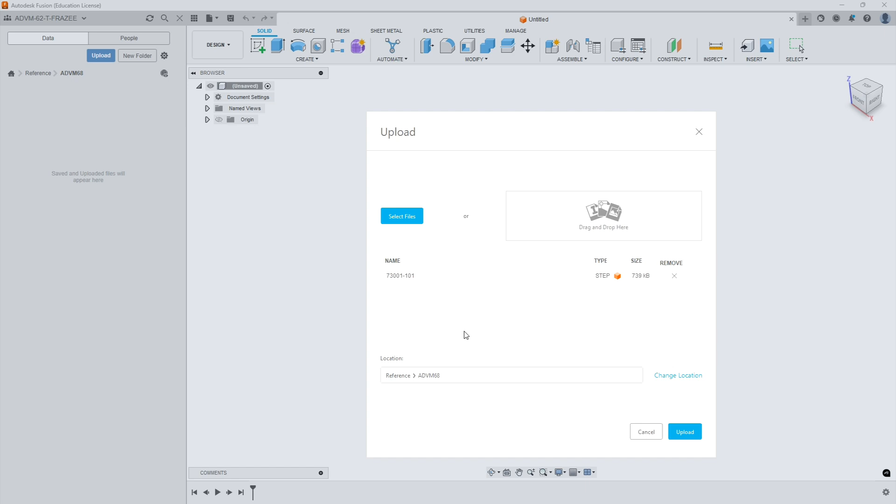Okay, and we're going to open that file. It's going to ask you where you want to put it. I'm going to put it in the location where I'm at. This takes a little bit of time to load, and you'll see it upload on the left. The icon should show up for the model. Depending on the system, this may take some time, so be patient. Then you can open the file.

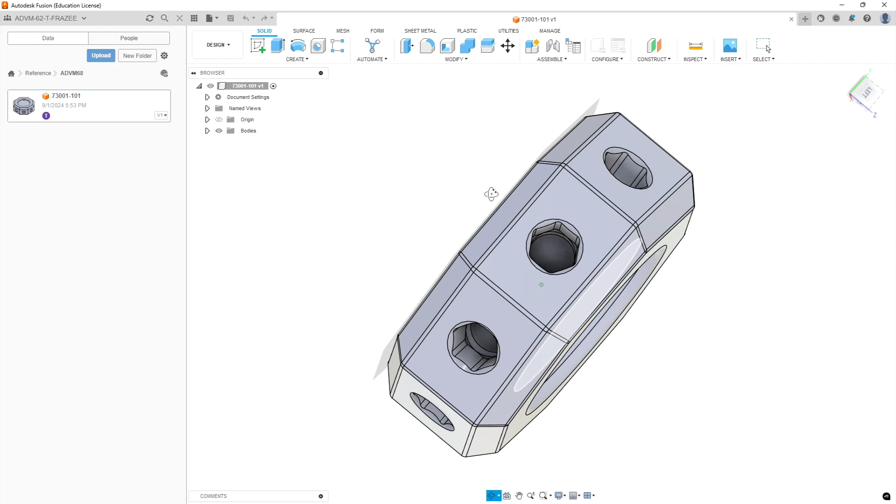Okay, so our file is this octagonal shape with a bunch of hex holes around the outside edge. We're going to use those to insert tool bits, like Allen size tool bits or screwdriver bits. This can be used to hold up to 8 different tools.

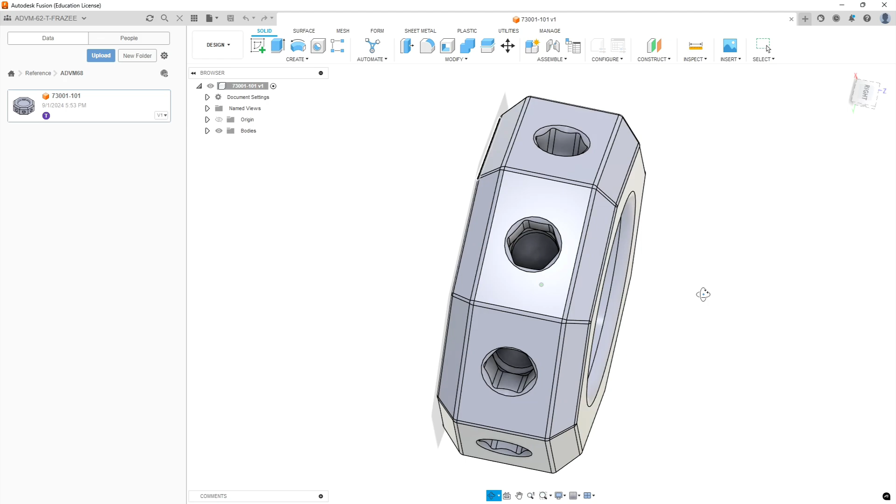Okay, so the first thing we're going to do is set this up as a 5-axis project. We've had the luxury of having blanks pre-made with the Raptor profile for the Raptor vise. The Raptor vise specifications are also in PDF format on Canvas, but if we take a look at the profile, this is a standard dovetail preparation for the vise holding system.

One downside of this system is that you have to have very tight tolerances on your prep, but it allows you to hold onto something with about 1/8 of an inch of thickness. So we're going to plan our stock around this dovetail and around a piece of material that's 1 inch thick from datum to its top. Our dovetail feature will be on the face of that.

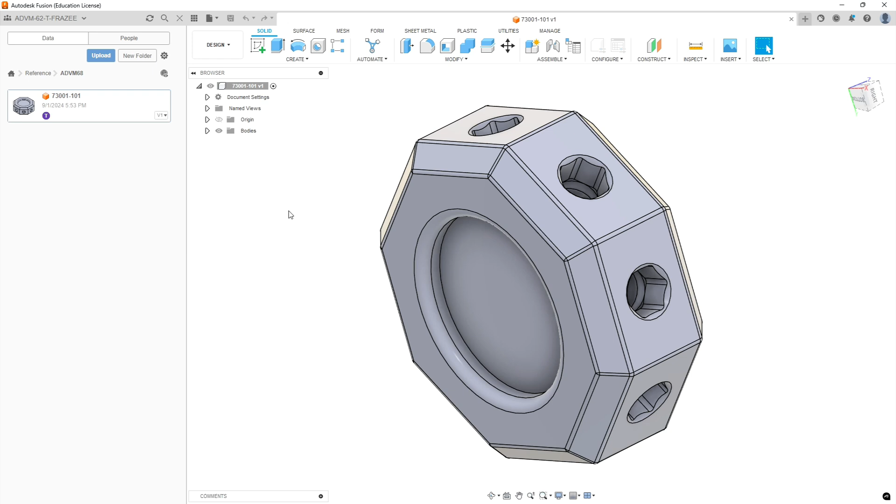Even though we've got pre-made blanks, we want to start off by modeling that blank, because in 5-axis it's going to help you with some visualization. So I'm going to flip back to Fusion here. What we have here is our piece, and if we were to inspect it, it's a 3/4 inch thick part.

Okay, so what we're going to do is create our volume, and it's a 2 inch by 2 inch by 1 inch volume that this part needs to fit into, plus stock to hold onto it with the Raptor profile. So let's start there.

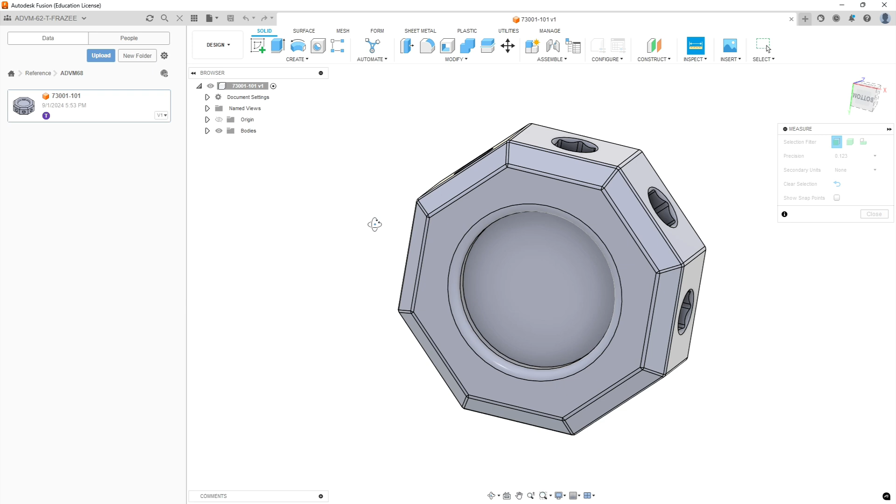We're going to go to Sketch, and we're going to sketch on the top plane. Okay, and we're going to draw our square. From our vendor, this is 2 inches. The top edge equal to the vertical edge, which gives us a 2 inch square.

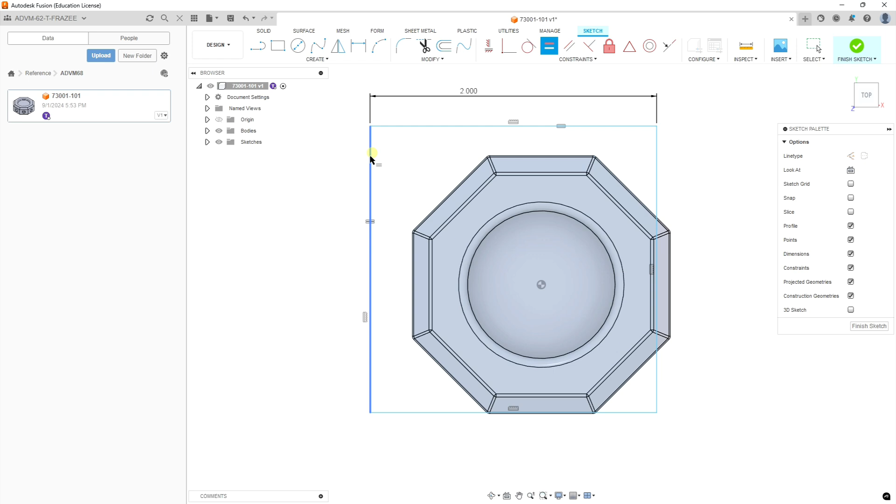Then if we take a line and go from corner to corner, we can convert that into a construction line by right-clicking on it. We derive this, and we should be able to get a midpoint relationship with the origin, which puts our volume centered on the face of this.

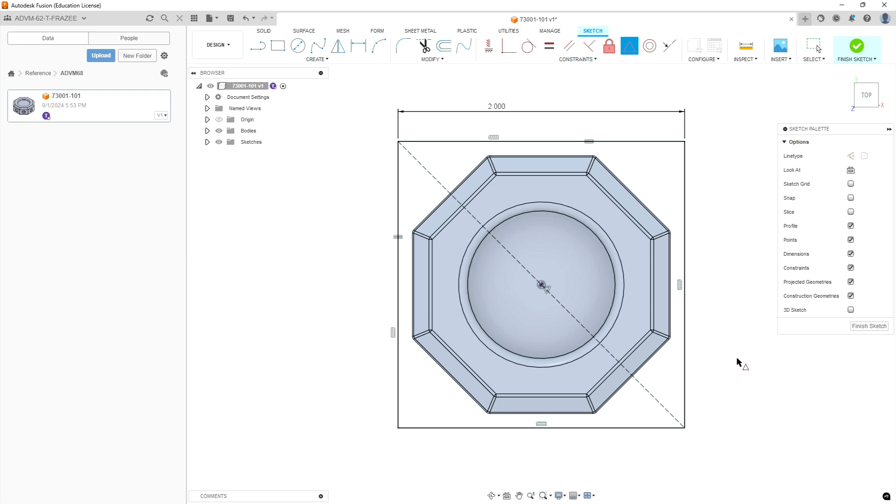Okay, so we're going to finish our sketch. The blanks we got are machined on the face, but we do want to cut a little bit off, that way we are sure that it's all true to our setup and our machine. So we're going to do an extrusion.

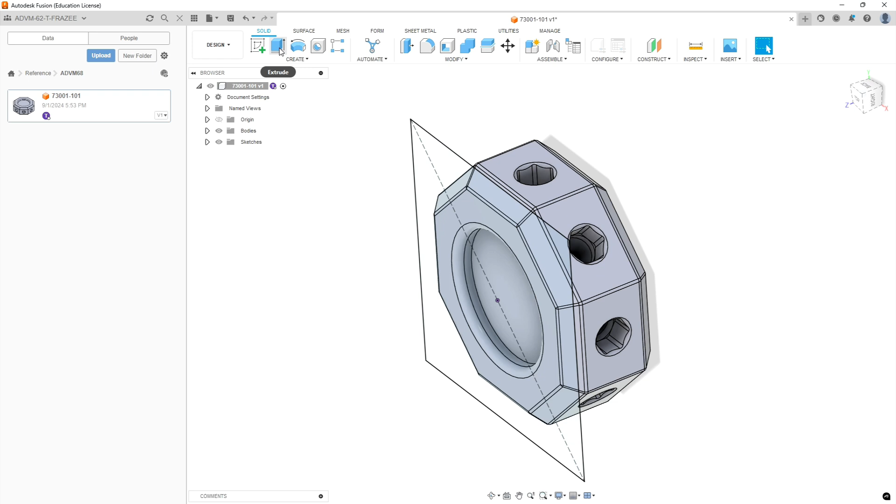We're going to hit all of these faces. We're going to create a new body. We don't want it to join, because this is going to be stock. And we're going to go ahead and go in two directions.

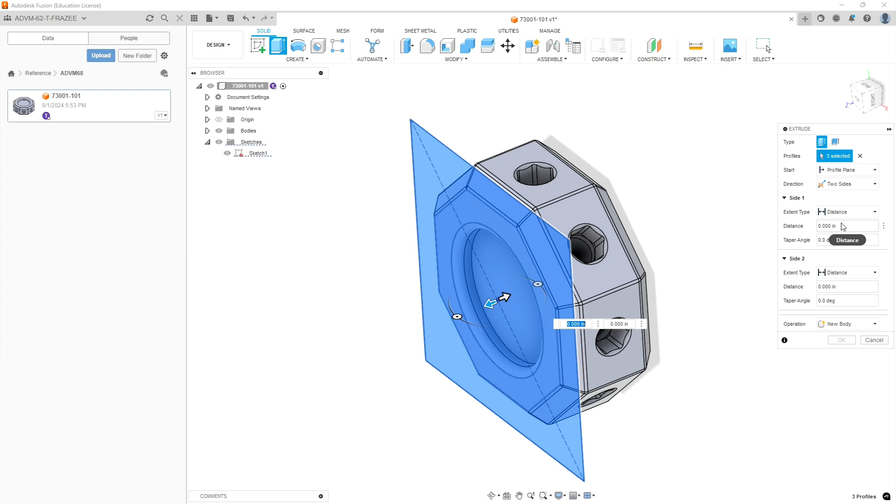In the first direction, let's go 30 thousandths. We just want a little bit of material. In our opposite direction, we're going to go 1 inch minus our 30 thousandths, so our total stock volume is 1 inch.

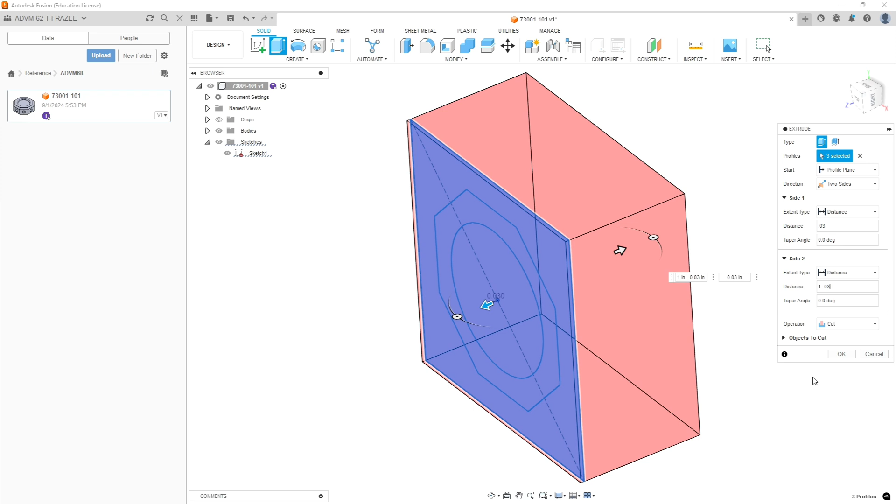Make sure that your setting is on new body, and hit OK. Now if we go to our bodies, we have part 1, which is the part we imported, and body 2, which is the stock. I'm going to change this to the name of the second body, to stock.

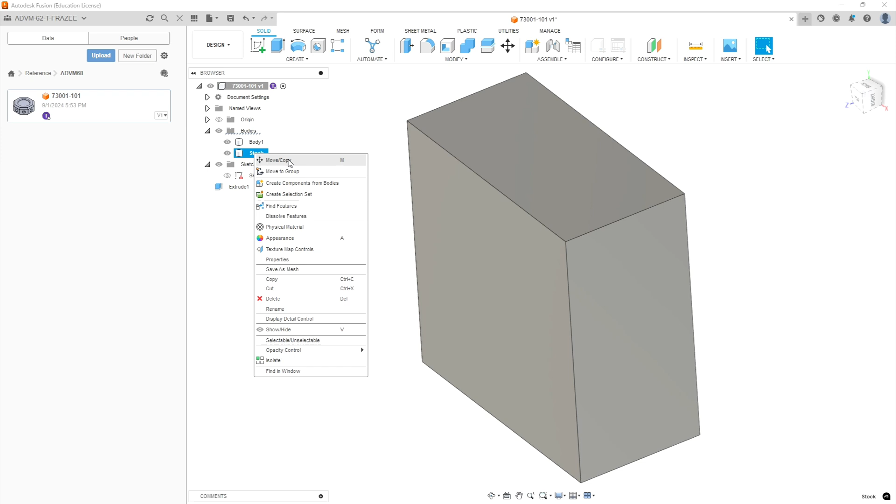If we make that body invisible, we see it there. What we're going to do is right click on the stock and make it 50% opaque so that we can see our part inside it. All right, so this is our piece of material, not counting the dovetail.

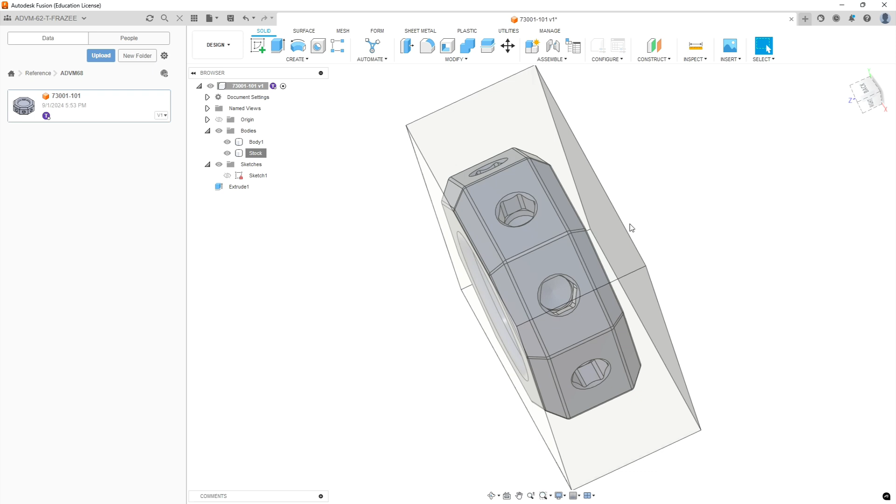Now we do want to leave a fair amount of room on this side because our cutters may need to go past, and we don't want to hit our vise and our 5-axis fixture. Okay, so here we go.

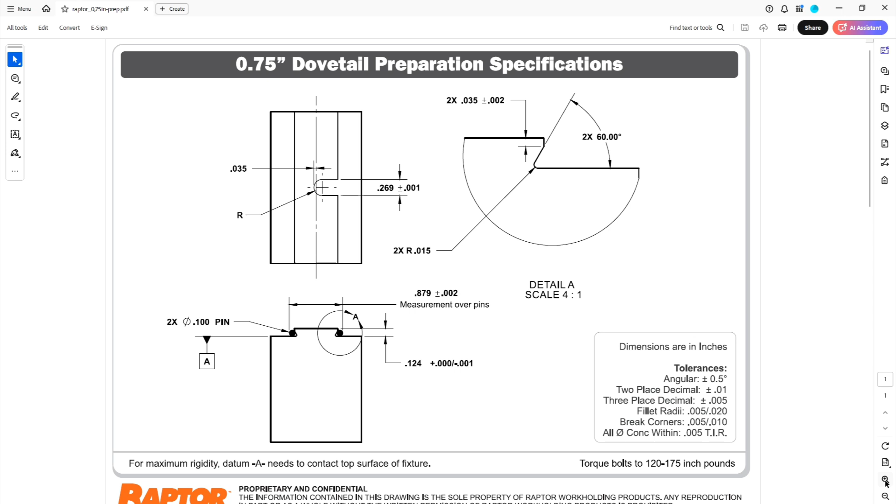Okay, so we're going to draw pins on either end so we can get the width right, and those are going to be just construction circles. That will allow us to put our dimension across the face of it, and then drive it where these angles go. Okay, and then we have our profile there. All right, so let's flip back to our sketch.

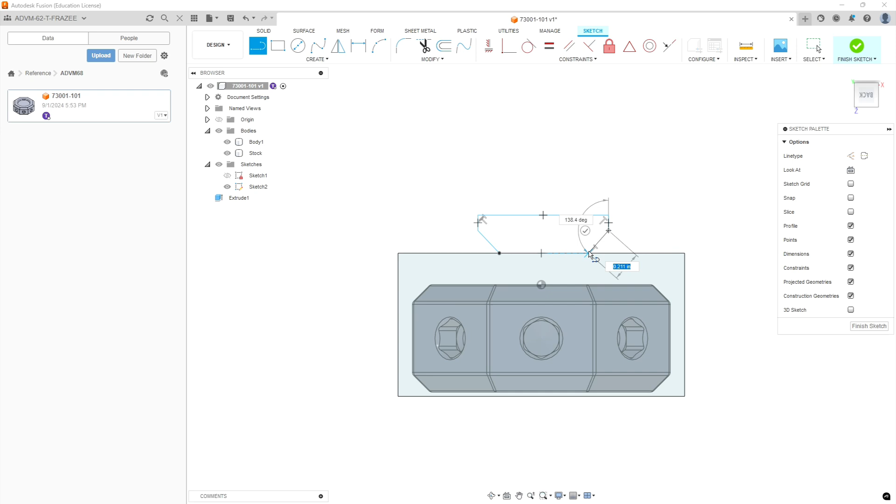We're going to start off selecting the side of the stock, doing it at an angle. We go straight up, across, back down, another angle. Draw a circle and then another circle.

We're going to take and convert both those circles into construction geometry. We'll dimension one of them. It's just going to be our 100 thousandths. This represents the pins. And then we're going to make an equal relationship between the two circles so they're the same diameter.

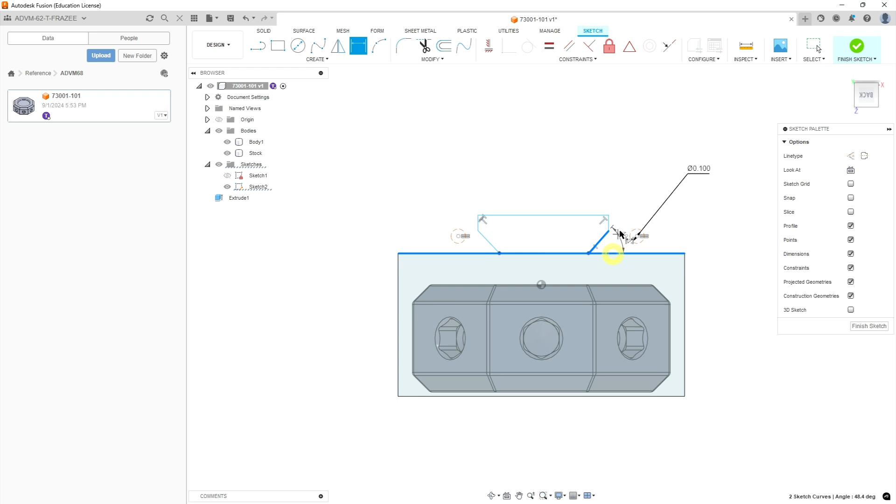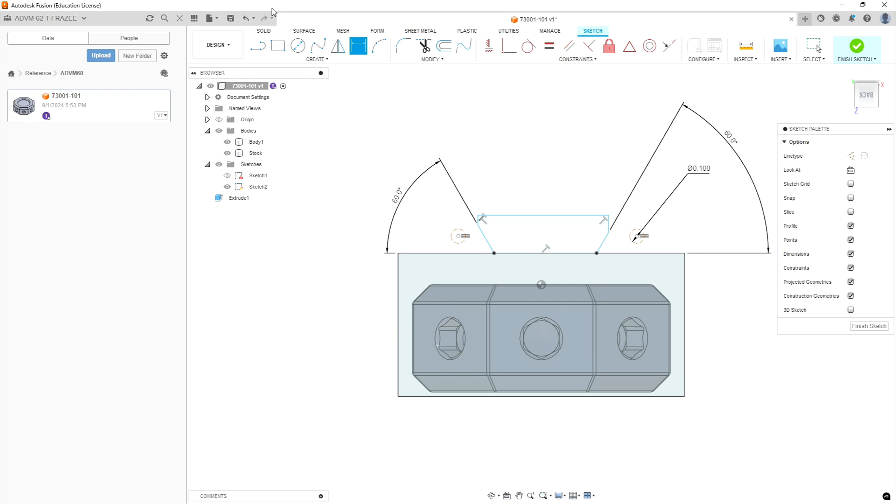We can then set our angle for the dovetail, which the drawing says is 60 degrees. I'm going to do the same thing on the opposite one. And then our little leg here is 2 times 35 thousandths plus or minus 2. So we're going to dimension one of those legs, and we can use the equal relationship again. Okay, so both of those are the same size.

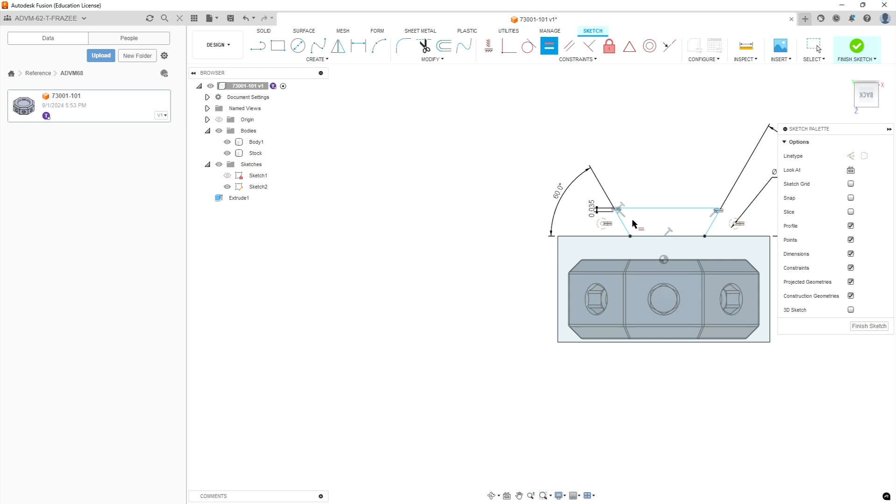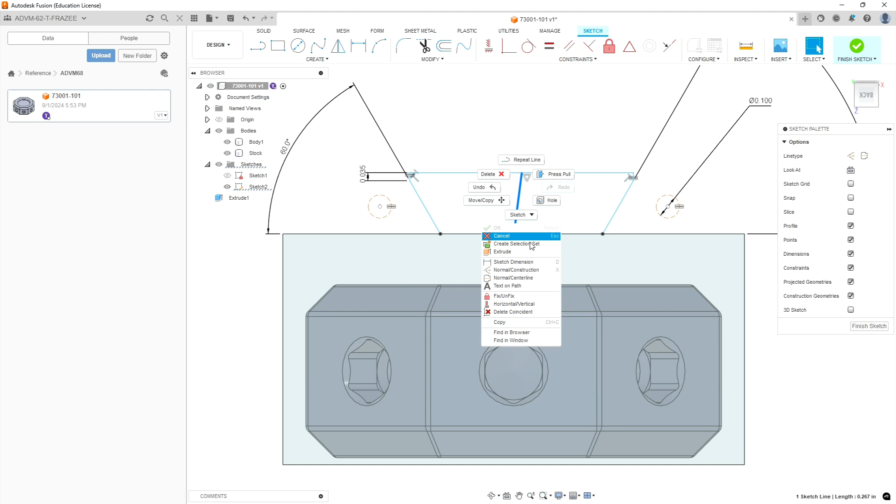Then I'm going to draw a line from the midpoint of our dovetail feature, and we're going to go to the center of stock, right here in the middle. If I create that as a construction line and force it to be vertical, I've now forced this entire shape to be on the center of our piece.

Now we're going to use the tangency command to make this first pin tangent to the vertical, to the 60-degree angle, and then we can insert, make it tangent to the top of the part. Repeat that in both places.

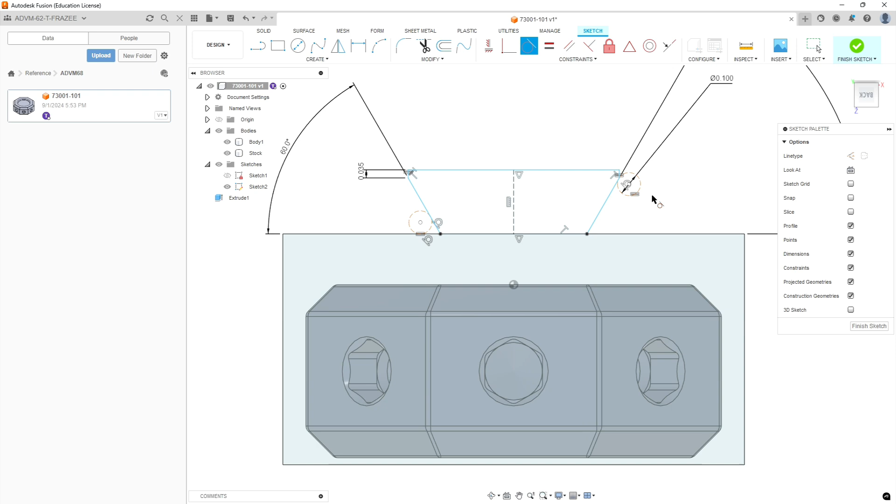If we go back to our drawing, the measurement of our pins is 879 thousandths plus or minus 2, and that's to the tangency points outside the pins. Flip back to Fusion. So to dimension two circles from tangency point to outside, rather than just picking the default, we're going to right click on the first circle, and instead of it defaulting to pick circle and arc center, we're going to pick circle arc tangent. We go over the first circle, then our second circle, and we get our distance across pins. That's 0.879 as our dimension. Okay, so that gives us our width.

The only definition we have left to do is the height of our material. So let's go back to our drawing, and it says it should be 124 thousandths, minus 1 plus 0. Okay, so it's very specific. Go back to Fusion. Dimension from top of the dovetail to the top of the part. We put 0.124, or 124 thousandths.

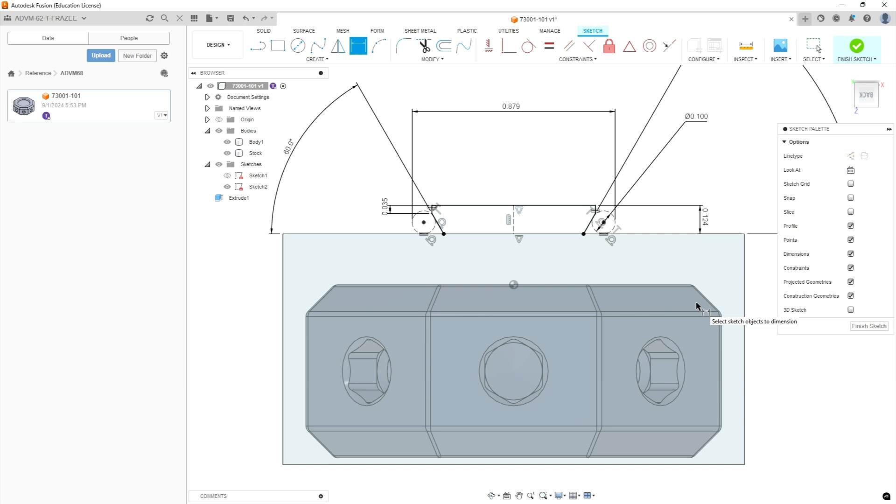Okay, that is the profile of the dovetail extrusion that we're going to shoot across the length of the part. Let's go ahead and hit Finish Sketch. Let's look at it in a 3D view, and we're going to extrude that shape, and we're going to go to object.

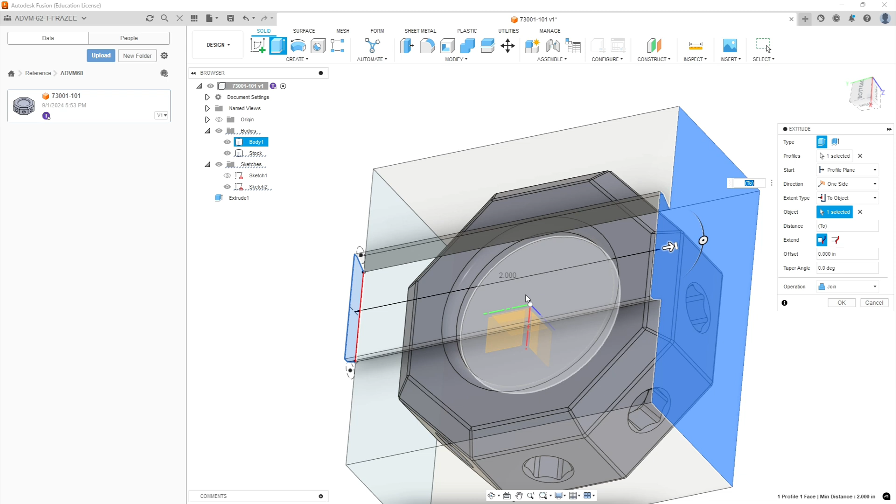And we'll select the other side of the part, and that will shoot it all the way across the full length. And in this case, we do want to join to the stock body.

Okay, now if we go back to our drawing, they have a notch in this, and we have a fillet that we needed to add.

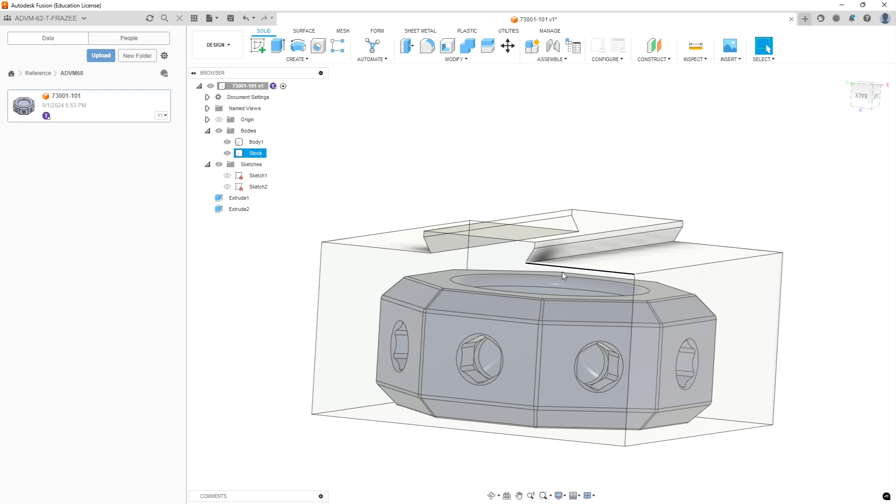I'm going to add this fillet after the fact, once because I forgot to put it in there, but also it's a little bit easier on the dimensioning. So let's put in our fillet.

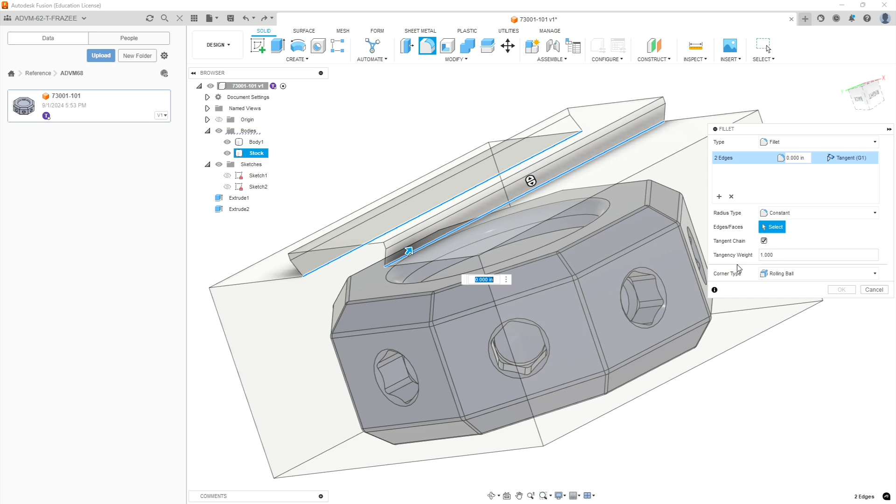Okay, so now we're going to put our fillet, and according to our drawing, it is 15 thousandths. Go back to fillet, select either side of the model, and 0.015 or 15 thousandths.

And I could have put that in my drawing profile when I extruded that across. My practice is not to do that on very small fillets. It allows you the flexibility to change it, and doesn't muck up your dimensions and intersections.

Okay, so now we need to put the notch in the top. And according to this, it is a 269 thousandths plus or minus 1 slot.

And there's a pin on the Raptor vise that allows you to load it and make sure that it's not loaded backwards, and that it's pretty much centered on the center of your fixture. And this is good for 4 and 5 axis, because when you put your blanks on it, you don't have to indicate them in and where the location is. It's repeatable.

And so this notch feature is just straight in. We use an end mill to cut it. And it looks like it's off-centered by 35 thousandths off the center line of the part, and 269 thousandths in width.

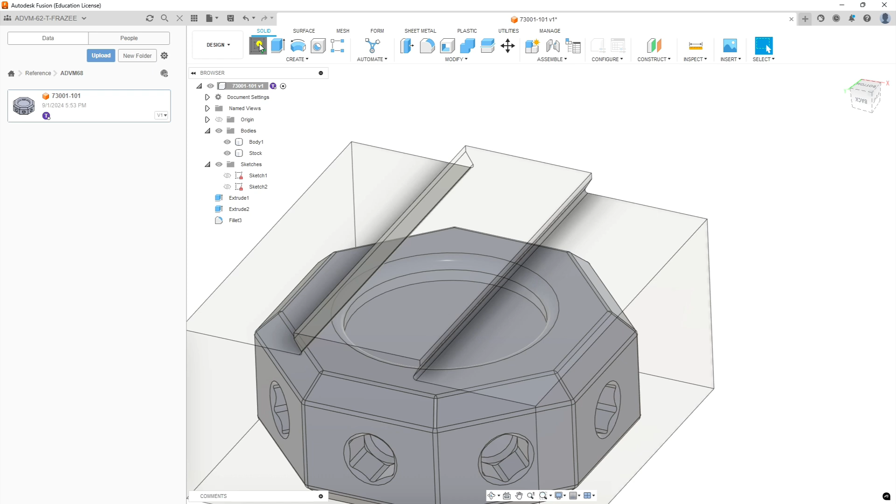So let's go back to Fusion, and we're going to create a new sketch to create that feature on the top of our part.

Okay, we're going to sketch from the edge of our part where the silhouette starts. We're going to come straight in. We're going to click, and then click and hold the button down, which allows us to draw a radius. We're not going to worry about the size.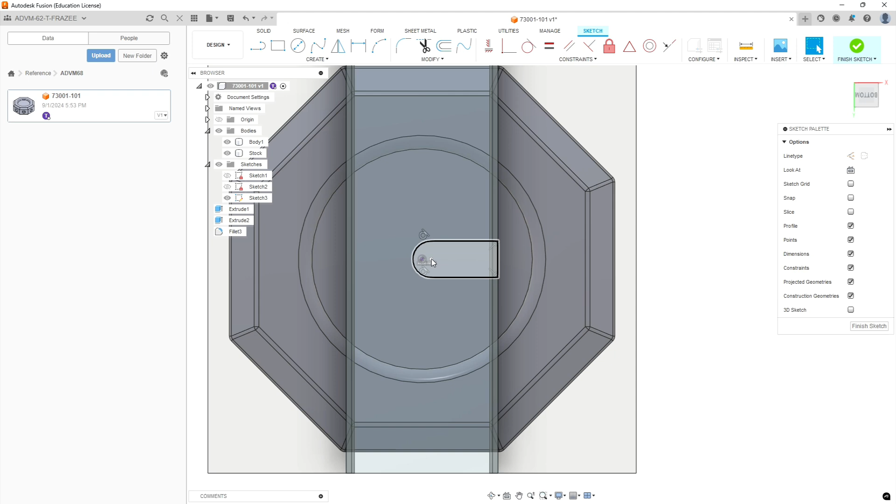Okay, now that we have it horizontally constrained, we're going to dimension from origin to the crest of the arc. So if we right click instead of left clicking, we can pick circle to arc tangent.

And that allows us to give the dimension as it is on our Raptor profile print. So on that, it was 35 thousandths. We're going to put in 0.035, or 35 thousandths. And that gives us the proper position of it in the horizontal axis.

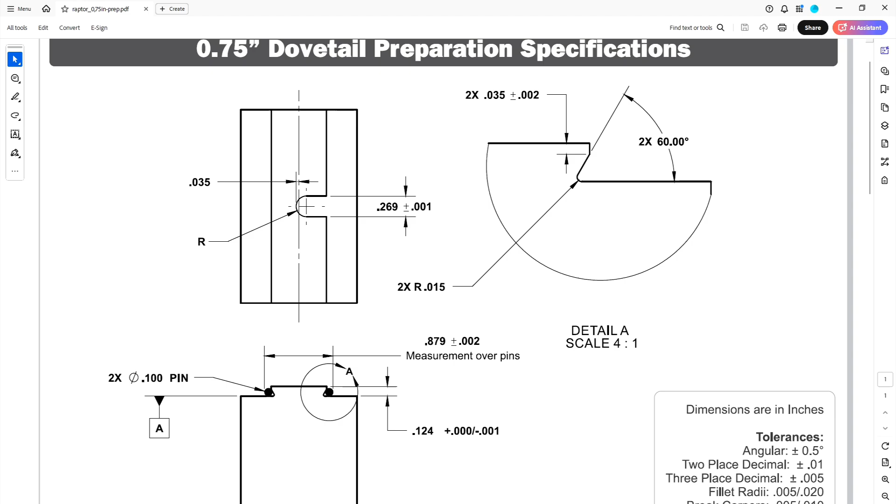Now our width, according to our drawing, is 269 thousandths. We'll go back to Fusion, and we're going to put in the width of our slot. It's 269 thousandths. That gives us our profile.

Our sketch is fully constrained. We can now finish sketch.

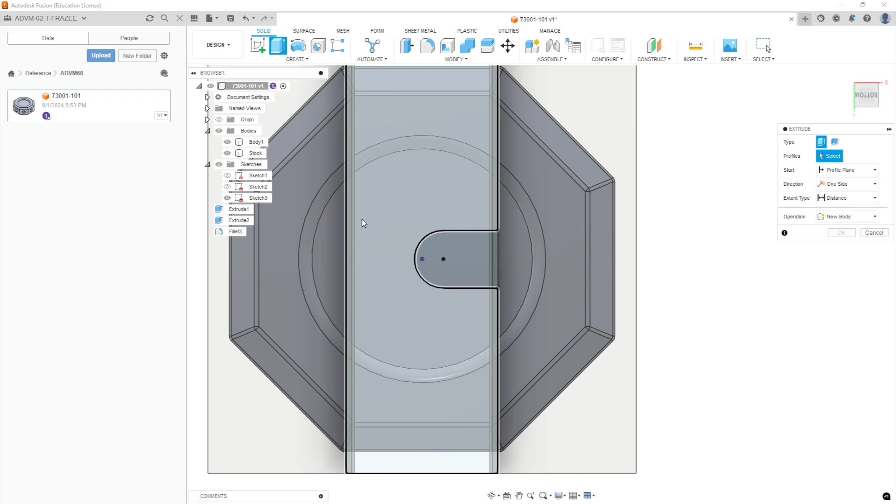And we should be able to do an extruded cut. So we're going to pick our zone, and we're going to do a cut, and it's going to be up to object. And we'll select the plane of the back of our profile there, and it'll cut out our button notch.

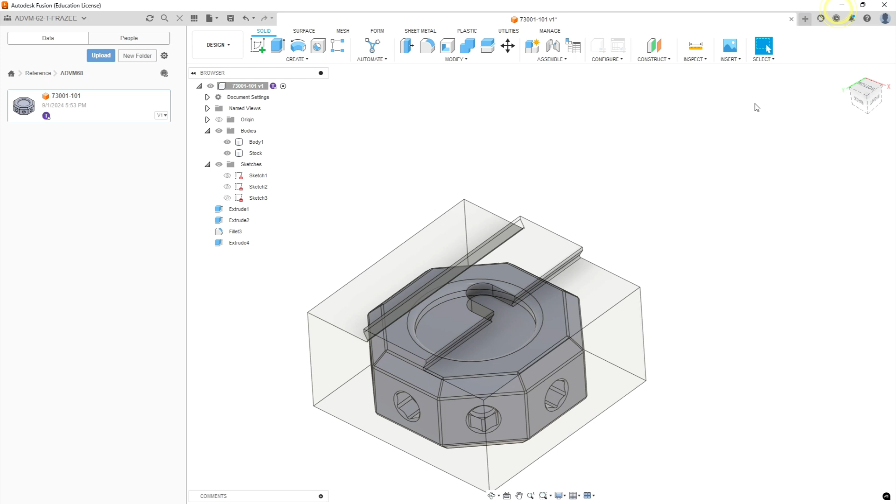Okay, now we've done this. If you were to need to machine this feature, you would go through a procedure to cut this with a dovetail cutter, and a cutter that's smaller than 269 thousandths, so a quarter inch end mill should do a nice job of that. I'm not going to go through that because this particular part is already prepped, but there will be another video on how to do that dovetail prep for this type of profile.

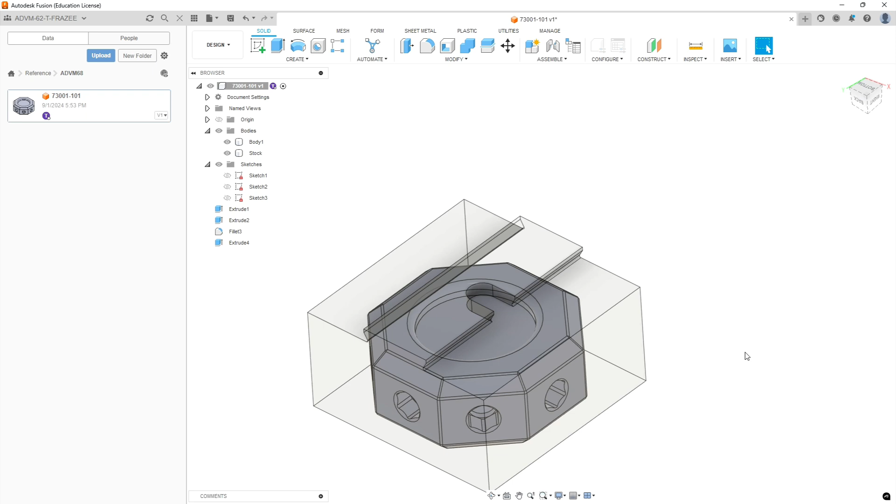When you machine it, you do need to measure it over pins. This vise system is very particular on its tolerances. So you may have to compensate at the machine.

And I'm going to go ahead, and while we're in here, I'm going to change the name of body 1 to the part number.

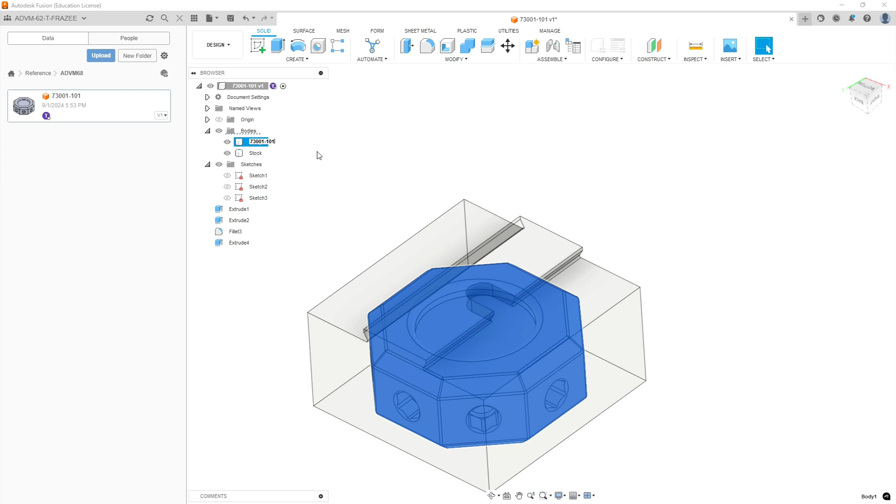Okay, so we've differentiated the two bodies, the stock and the model. We want to make sure we're saved, and we're saving often.

Now that we have our stock and our part on two separate bodies, we can hide and show which one we need, and differentiate them for when we go into manufacture mode.